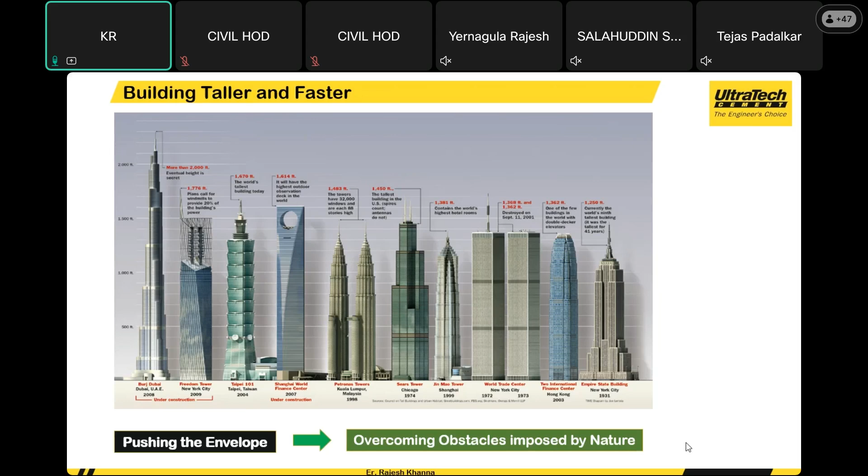The current construction happening in Saudi Arabia, the Jeddah Tower, is over 3000 feet. Just imagine, as concrete designers, these composite structures coming up. Earlier, because of limitations in size, shape, and moving up to a certain height, we were restricted to 1000 or 1200 feet. Over the ages, as technologies have been adopted and lifting systems put in place, we are now in a capable position to build towers and superstructures beyond a kilometer in size.

That's how we can imagine super tall buildings, most of which are found in Asia and the Middle East. Out of the 100 tallest buildings in the world, 59 are in Asia and 23 are in the Middle East, leaving 18 to the rest of the world.

In the next 3 to 4 years, we expect the tall Jeddah Tower in Saudi Arabia to surpass the current height of the Burj Khalifa in Dubai. The Burj Khalifa is about 2,716 feet tall, whereas currently we expect the 3,280-feet-tall Jeddah Tower to come up.

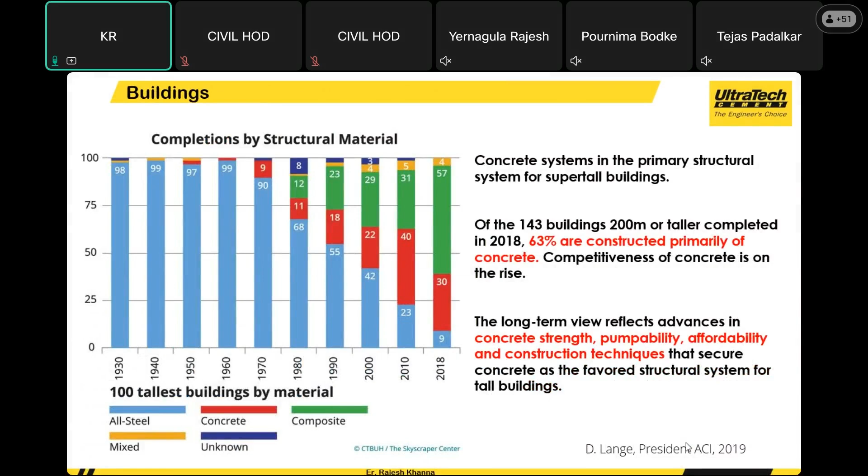And because without concrete there is no other material for infrastructure to go beyond. And if you see the facts, more than 2 tons per year is produced for every man, woman and child on the earth, making it the second most usable material after water. Basically it has been used mostly for housing sector, roads, bridges, utilities, power supplies and industrial buildings.

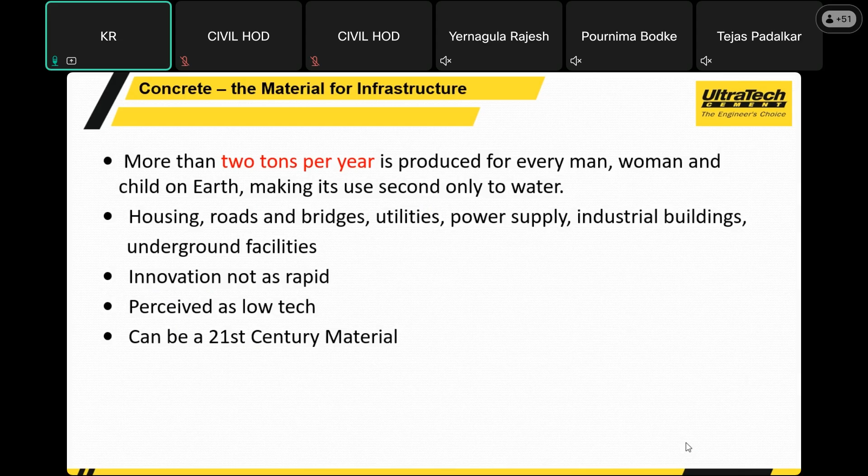I would say innovation is not so rapid because when we compare with IT systems like mobiles, TVs and other IT systems, the innovation is not so rapid. That is what it could be perceived or assumed to be a 21st century material, yet it is perceived to be a low tech material. So it is cost effective also.

So in the 21st century, we should have concrete which is more durable, more constructible, more predictable, more green.

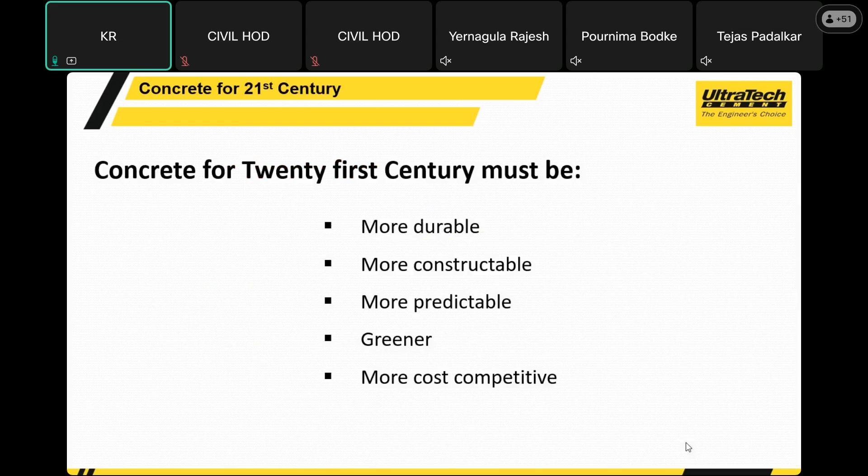More predictable, greener, more cost competitive. In such case, even in concrete, we also have certain challenges with the materials that we have. One is the most major constituent material that we use is cement. Even in cement industries we see challenges, and during the past, present, and future also we have these challenges. India and China will be contributing about 50% of global cement output by 2050.

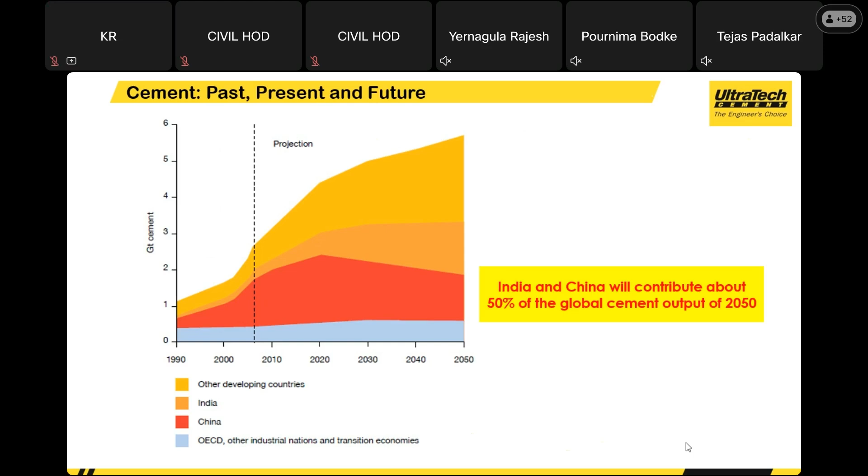Excuse me, sir. You're muted, sir.

Is it audible now? Yes, sir. We can hear you. Earlier it was audible, or now itself it has been muted? Now itself it has been, sir. Just now. That's it. Just now. Okay, sorry. Okay, I'll keep continuing from here.

The cement production capacity that we have for 2050 is 750 million tons per annum to meet the demand for the infrastructure that we have worldwide. Current available limestone reserves are expected to last for about 35 to 40 years, maybe, with the current rate of production. There is a huge challenge for cement manufacturing companies also worldwide.

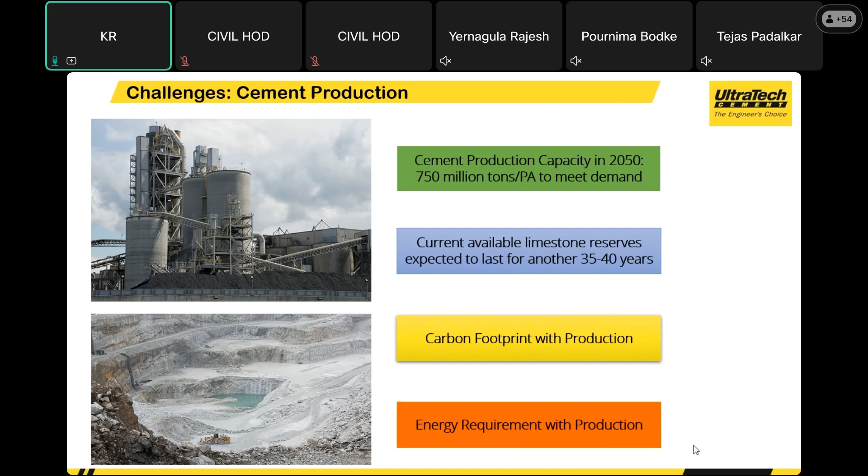One is the carbon footprint. So much carbon emissions are being emitted to the environment, which will lead to global warming concerns. So even though there is huge energy required for production, so much coal is being burnt, so much heat is being generated, so much power is required to produce 1 ton of cement, so much kilojoules of energy is required.

So these are all the concerns, and we have alternatives to cement production, which research scholars are still working on from IITs, NITs, and worldwide. There are many research scholars who have been working on this.

Now, currently, the trend which has started, even many companies have started adopting this LC3 cement, which is limestone calcined clay cement, which will even replace the clinker content in cement manufacturing, where clinker is the major component in the cement.

But now to have a replacement, we use calcined clay at 30%, limestone at 15%, and gypsum at 5% to produce the cement. That is how LC3 cement has been produced.

This would be a dead blow to the cement industries. Maybe they may not even implement it, or it would become a requirement when we are short on limestone reserves.

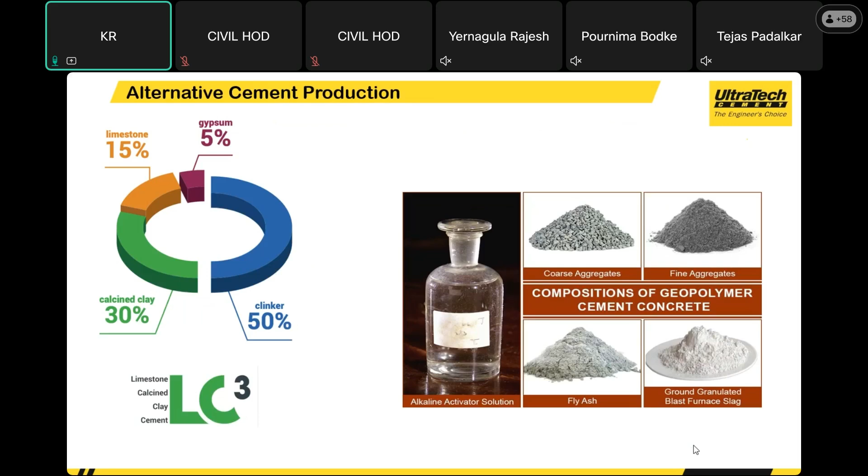This would be an alkaline activator solution, which as a replacement to limestone and all, we can even produce concrete. It is a no-cement concrete, I would say. Coarse aggregate, fine aggregate and fly ash would be the alternative additions for geopolymer concrete.

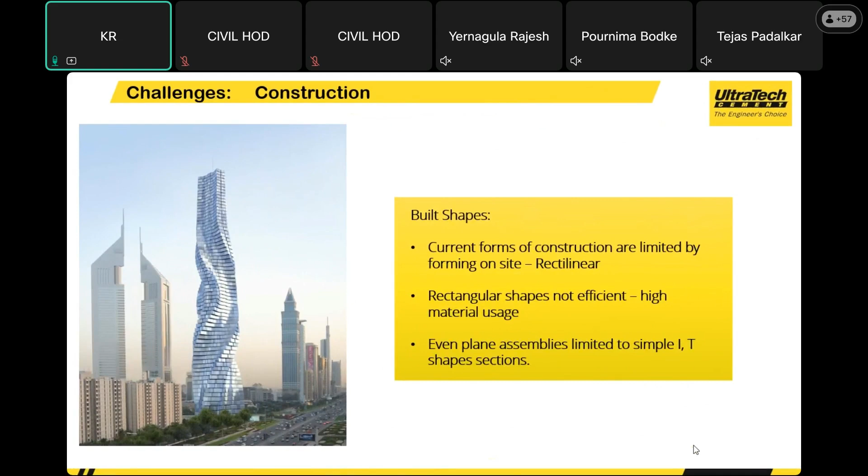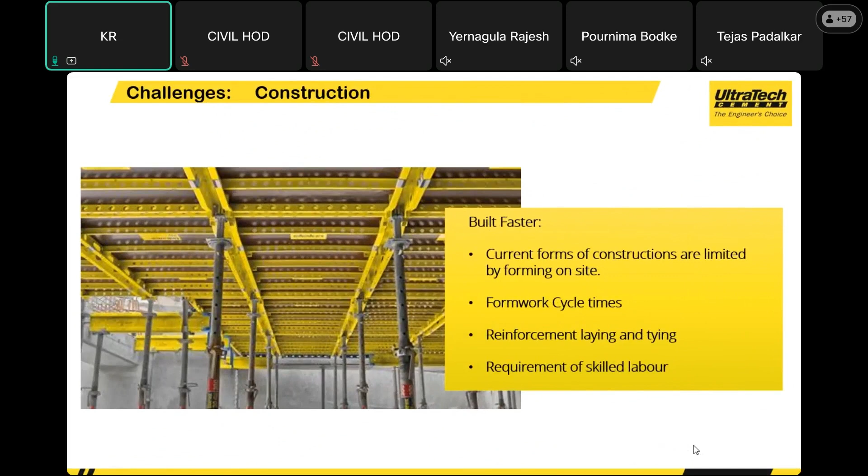Even in construction, we could see there are certain challenges. The current shape of buildings and current forms of construction are limited by forming on site. Rectilinear and rectangular shapes are not efficient, high material usage, and plane assemblies are limited to simple I-section and T-shape sections. With current formwork cycle times, and reinforcement laying and tying requiring highly skilled laborers, we could not go ahead in building faster or taller constructions. So that's how certain challenges exist even in construction.

But here, if a mechanical engineer or an automobile engineer had thought to give a capacity for four or five in all, beyond that it cannot work - the engine cannot even accommodate to pull this load, this much horsepower. So autos would not have been so popular in India. So that's how it takes extra horsepower or more fuel to pull such loads.

Here also in our context, if you're talking about construction, it is a great challenge to civil engineers working on the foreground to design durable structures. There is a huge gap that is still there.

That is how in the near future we need to bring it down - structural consultants or structural engineers who design any structure sit in a different office, while concrete designers like me sit in a different setup at an RMC plant, ready mix plant, or at site. So what happens is there is a huge gap. We don't sit and discuss when we want to design any structure. Concrete is only thought of as a strength-based material.

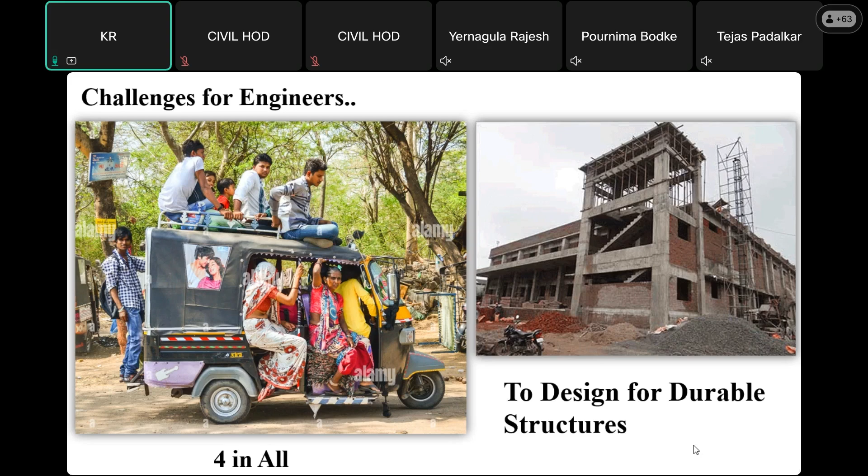But when we see structures designed for 100 plus years, like Statue of Unity or Delhi Metro, which is designed beyond 100 plus years, it means concrete casted today should have a life of about 120 years, should not have any premature issues. It should be durable and the durability should be more, without replacing or using alternative materials. It should be more sustainable and have more service life - that is the next thought.

So making concrete responsive to the requirement means you should have tailor-made installations. This could be the next future ball game, because each construction is a different ball game. In India we have also started implementing performance criteria or defect liability clauses that are being included in the contractual agreements by any contractor who does any project, building, or infra project.

It means whatever construction is done by a contractor should have sole responsibility for a certain number of years, so that the structure is under his custody or control, meaning if anything happens he has to repair and rehabilitate it and hand it over to the client. That's how the performance criteria comes into picture.

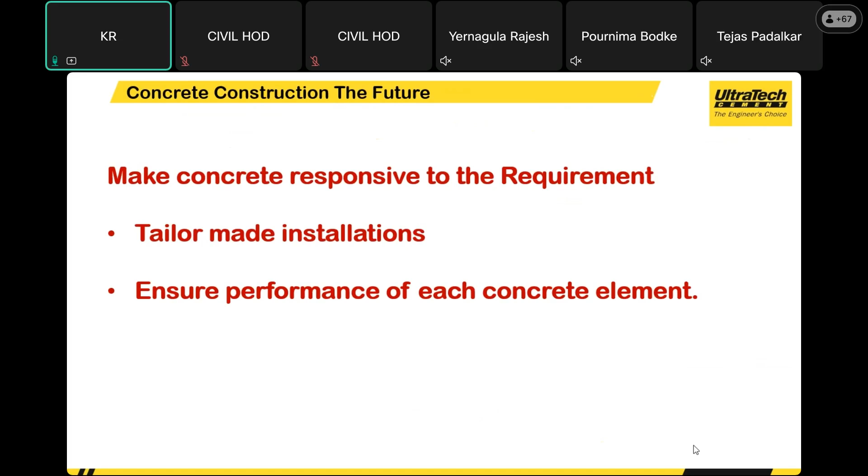Most of the IS codes are being revised in the near future, with performance criteria and material science related to concrete being considered by all the research scholars working on concrete technologies.

When we think about concrete for any construction requirement, apart from four points - grade, cost of concrete, and workability - ultimately where we still stand is only on strength. That is what all codes so far are still talking about: characteristic strength of concrete, or FCK. Beyond this, there is no point that comes to mind when we talk of concrete.

We generally think that mixing basic ingredients like cement, sand, aggregate, with some partial addition of admixtures, will make the concrete - that's what we have in mind. But beyond this, in the near future, this would be the thought.

To give a classic example to help you understand, take a star cricketer like Virat Kohli, who has great fitness and can stand on the field with high energy levels. His diet, his entire system, is something different from what a common man has. A common man can eat biryani at midnight, but Virat Kohli may not, because his system says he shouldn't, since if he eats biryani at odd times or takes a high diet, he has to hit the gym for 3 to 4 hours.

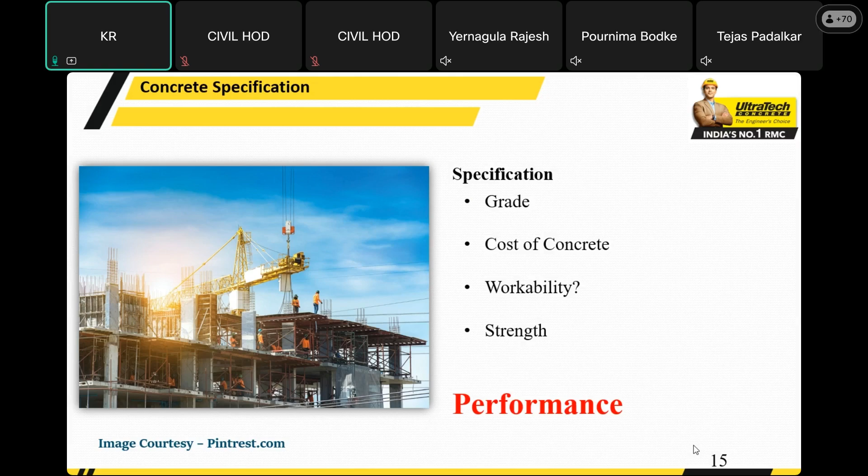So now when we talk about concrete for performance-based design, the methodology is such that structural criteria are expressed in terms of achieving performance objectives - performance during formation and during the service life.

So we have a conventional method. As I said, we are still only talking about strength, where FCK is the point of discussion. Concrete as a material is only looked at and talked about in terms of strength. So all structural member capacities - even structural engineers working on the ground - are still looking at steel members to handle stability or take huge loads.

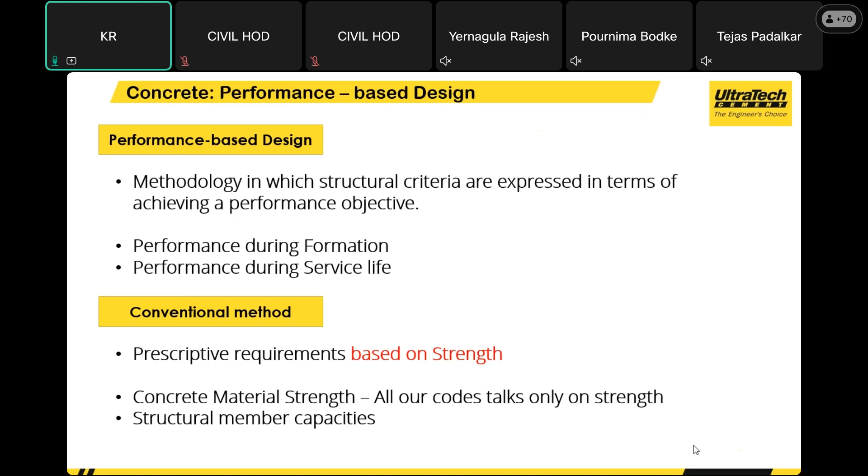So in the near future, I think the higher grade of concrete that we can now achieve with all locally available materials is M200, where Ultratech takes the pole position in doing this with Indian locally available materials, with no fancy powders added. It means it's even replacing the strength of steel.

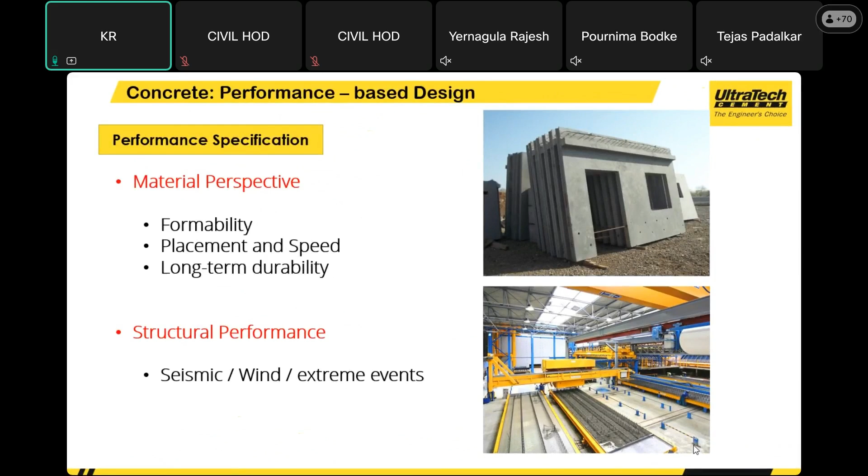That's how concrete can be easy to form, easy to place, with speed and long-term durability. Now you can even set the concrete on demand. Suppose you wanted concrete that sets in 2 hours, not just the 10 hours our code specifies - it can set in half an hour, or 1 to 2 hours.

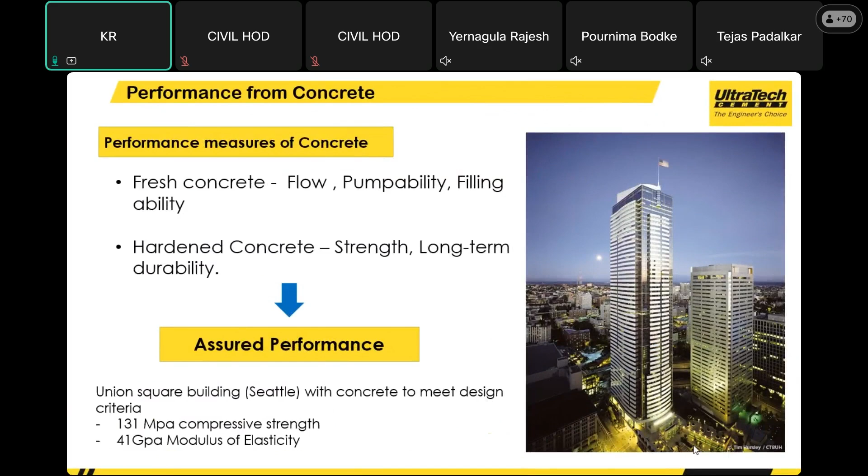Or if you want to accelerate the setting time, you can add fantastic different admixtures that are available right now. Now, if you see the ideal concrete we talk about right now, it should flow like water - meaning it should be pumpable to any extent.

Now if you imagine the Statue of Unity, the concrete prepared at zero level at a batching plant on site was pumped up to 600 feet tall - meaning it should flow like water. But water means we tend to see segregation, bleeding happens, and the concrete becomes porous, so we generally don't recommend adding more water.

But now to have a concrete which can flow on its own, we call it self-compacting concrete. There are viscosity modifying agents being included in these admixtures, which now gives a fantastic combination that can flow like water.

So we can set the concrete on demand, say for 2 hours if you wanted it to set and get hardened. There are fantastic accelerators which can be used to achieve ultimate high strength, rather than waiting for 28 days or 56 days or other strength criteria. Now you can expect your 28-day result, say for example M30 grade concrete, we expect 30 MPa at 28 days, but this 30 MPa can be achieved in just 12 hours. It means in half a day you can get this strength, so it should gain its strength rapidly.

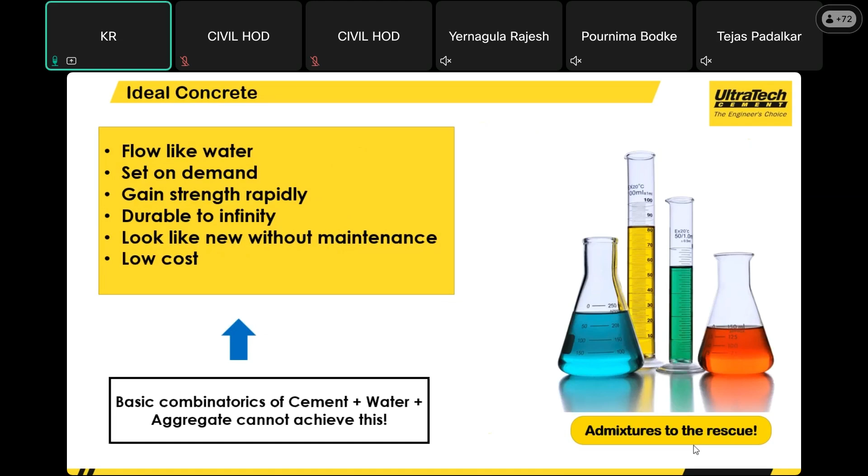And there is a big laundry list of admixtures - I won't touch on this more because it will take us into a different subject. But we have gone almost beyond this now. If you want to avoid corrosion happening in concrete, we have corrosion inhibitors, air entraining agents, accelerators, retarders, and integral waterproofing admixtures.

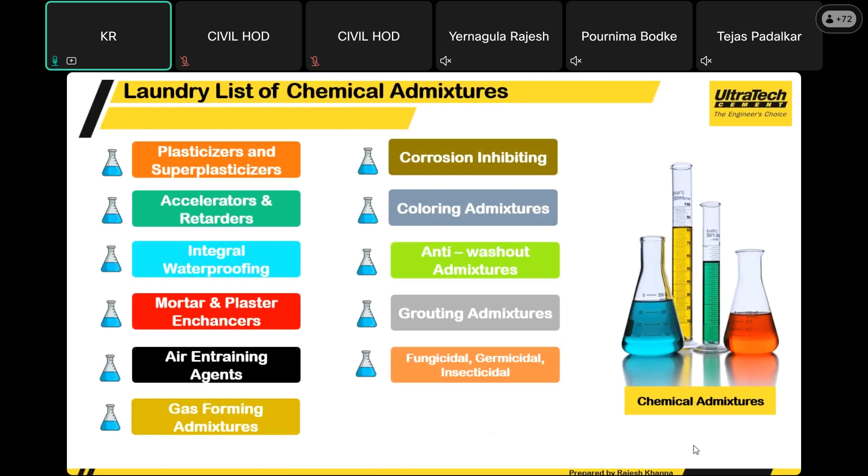Now we are in a trend where we use super plasticizers and hyperplasticizers - a huge development has happened in admixtures. In olden days, some decades back, there were certain constructions where animal blood was used in concrete to achieve retarding or accelerating kinds of nature. So that's how we started from there.

Now we are in a super plasticizers next generation, where we use viscosity enhancing additives. And in the near future, we may also see more advances coming in admixtures which will help the rheology of concrete.

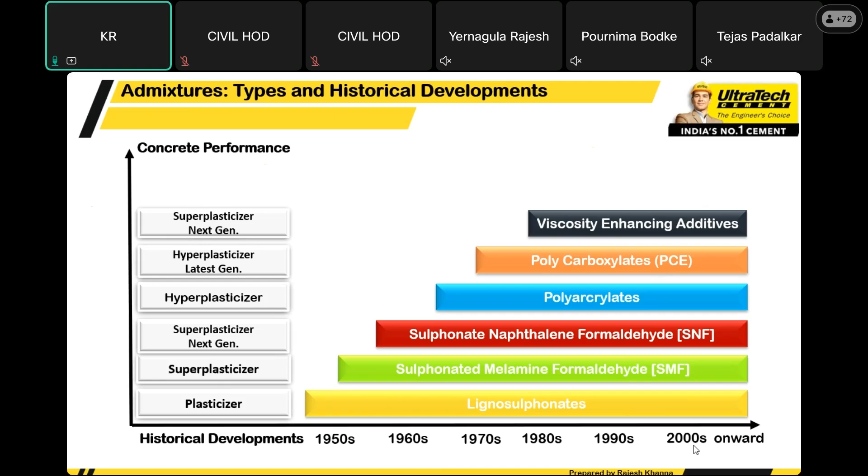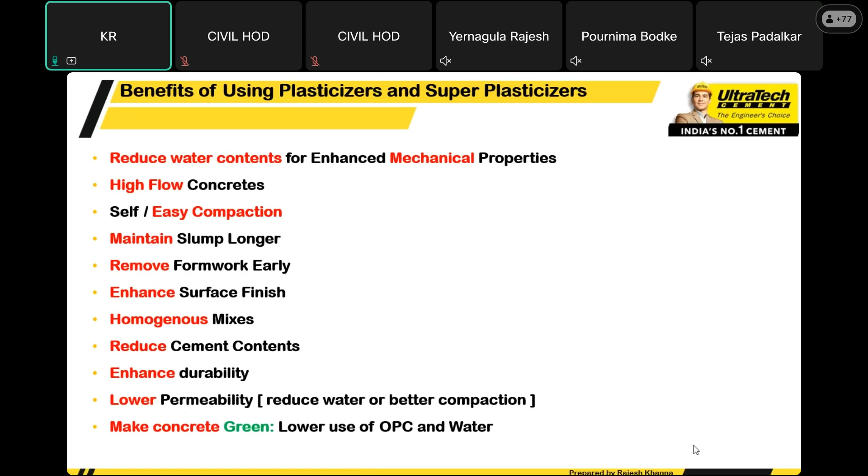Because in concrete, if you think about it, every material is a natural resource - from limestone to natural aggregates, coarse aggregate or fine aggregate, and the water we add - everything is a natural resource. To mitigate and minimize the usage of more natural resources, we have replacements called supplementary cementitious materials or mineral admixtures, and chemical admixtures try to reduce the water content. Water reducers are there, high range water reducers, so that you get great strength and more durability.

How does this happen? So to see this compatibility between admixtures and cement in a simple way to understand - like a boy and a girl who want to get married, we take both of their horoscopes and go to a pandit to see if their stars align, so that they get a better life after getting married. That's how we need to understand admixtures and cement in a big way, to understand the compatibility, because each admixture will behave differently with each cement, each source of cement.

So before we carry out using these admixtures in concrete, we understand the compatibility through the Marsh Cone test, to understand flow, stability, and passing and filling abilities, in such a way to enhance the compatibility of the cement and admixtures. So when there is any compatibility problem, it could affect properties in terms of more rapid loss of workability, quick setting, retardation of setting, or slow strength gain.

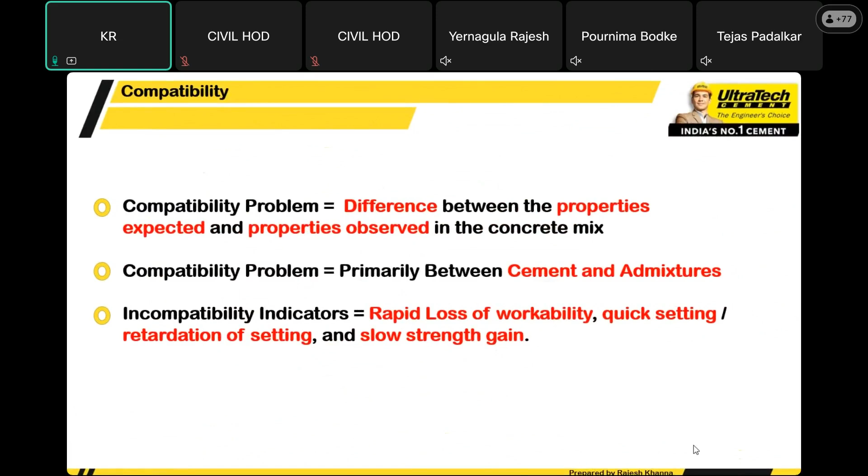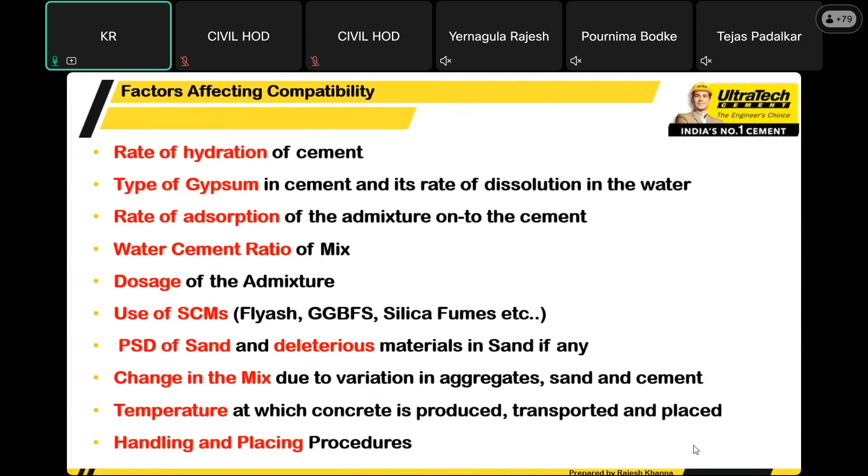That's how the compatibility challenges that you could see. Moving on, there are many more factors affecting it, like rate of hydration of cement and water-cement ratios of mixes. These are the factors affecting the compatibilities, and much more depends on the climatic conditions also. There could be some challenges that we could see.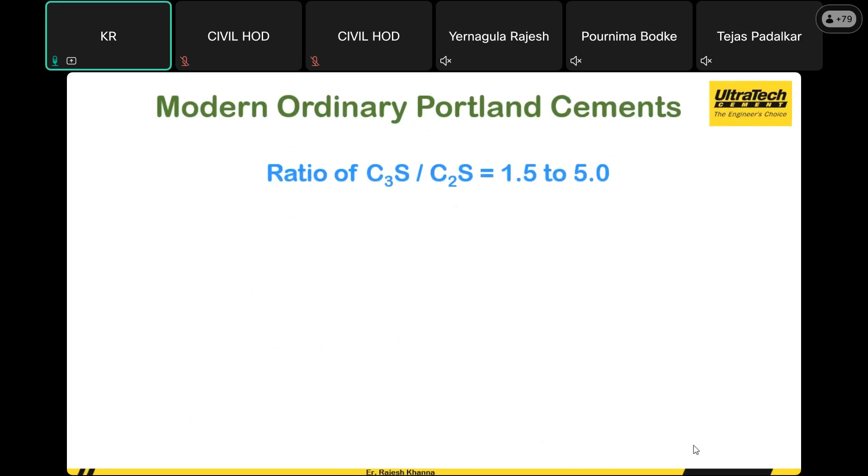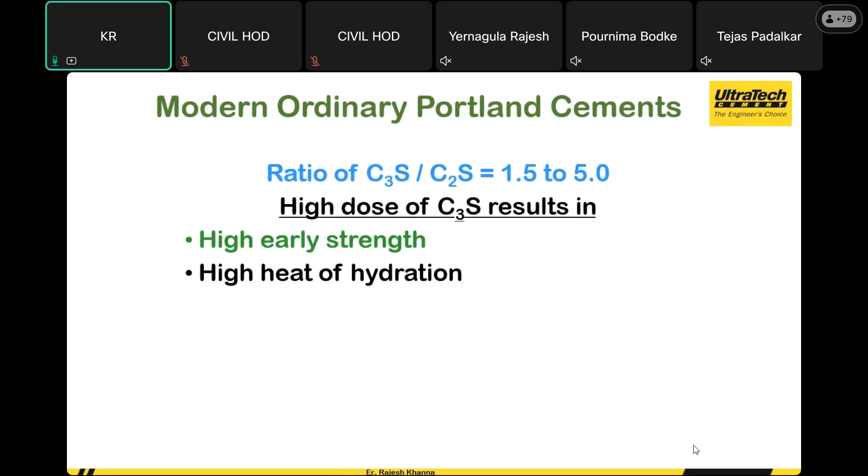If you see modern ordinary Portland cements, when we talk to any consultant or construction contractor, they say we need more content of cement. I don't know why - there's no logic in that, saying that when we add more cement to any concrete mix, we'll get more strength. It's assumed in a clear way that more cement means more strength, but it's absolutely dead against that. We can even achieve high strength with less cement content in any concrete mix.

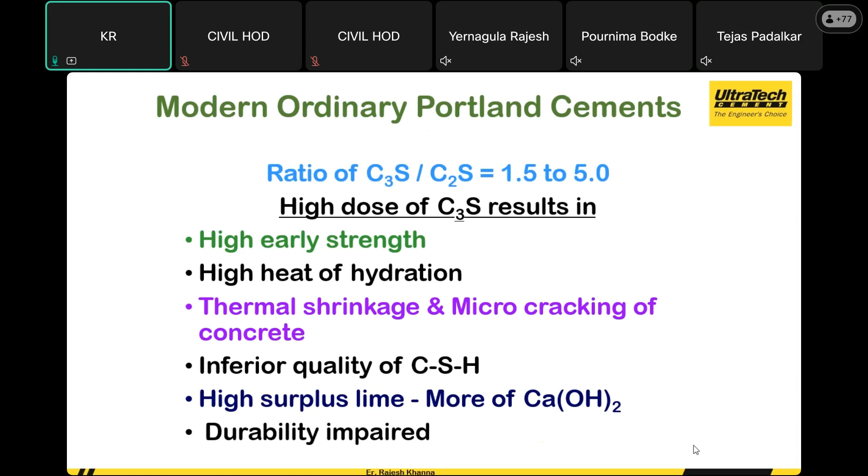So to have high early strength, you get high heat of hydration. If there's more high temperature in the concrete, it leads to thermal shrinkage and micro cracking. That's why when we go for thick rafts and mass concreting, we bring down concrete temperatures in a big way, reducing 10 to 15 degrees, by adding chilled water, or reducing the cement content by 50% and replacing it with mineral admixtures like GGBS, fly ash, and other additives to gain strength. By doing this, you'll see a huge drop in shrinkage cracks, and micro cracking of concrete doesn't happen.

That's what when we design any concrete, we need to understand all this material science in a big way. One alternative is blended cements, already produced at the plant - what we call Portland Pozzolana Cement (PPC), where fly ash is induced at the time of production itself. We also have PSC cement, Portland Slag Cement, where we use GGBS as an alternative, produced at cement factories and transported to sites for different uses.

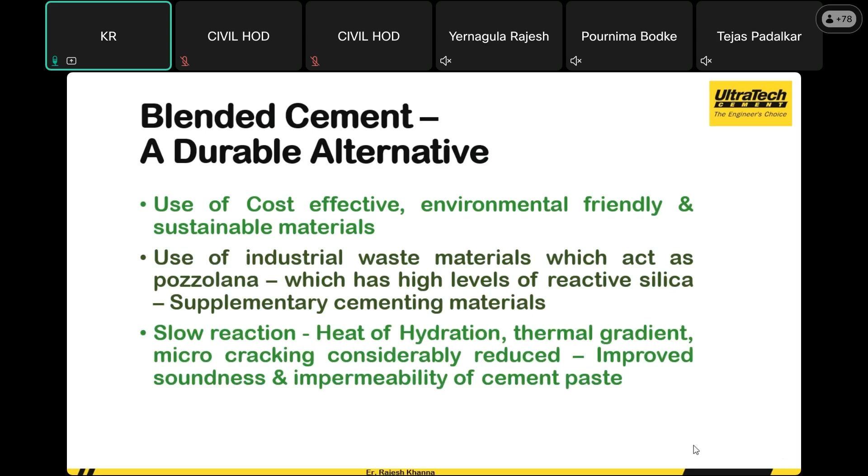When we use these supplementary materials or blended additives, they have a slow reaction where the heat of hydration is much less, and micro cracking is considerably reduced, improving soundness and impermeability of the cement paste. That's how we see sustainable or durable options coming up when we use blended concretes or cements. We get better reduction in bleeding - the mix looks like kozhukattai, like our curd rice. There's much improvement in workability. That's how supplementary cementitious materials keep helping us.

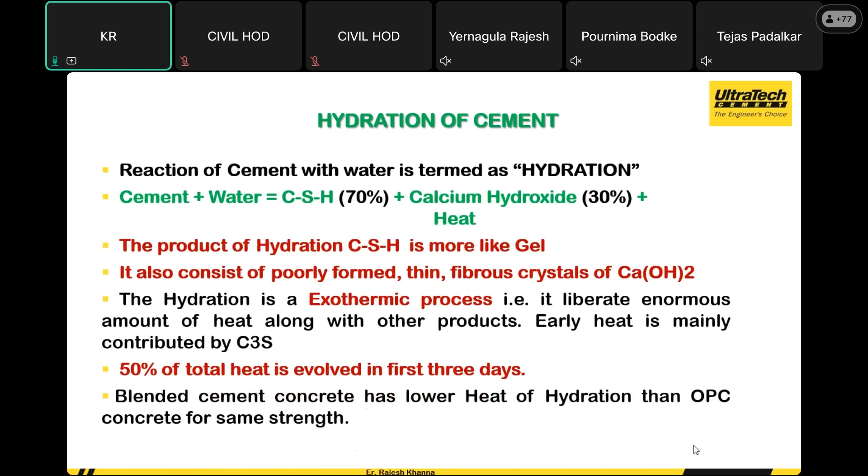When we see hydration - how this happens when we add water to cement or concrete - we get a reaction which forms CSH gel, more like a gel, plus calcium hydroxide of 30%, plus heat. With OPC grade cement or concrete, you have only single action hydration. It's like primary - calcium hydroxide plus CO2 plus humidity would degrade, and there would be only single action of hydration which happens.

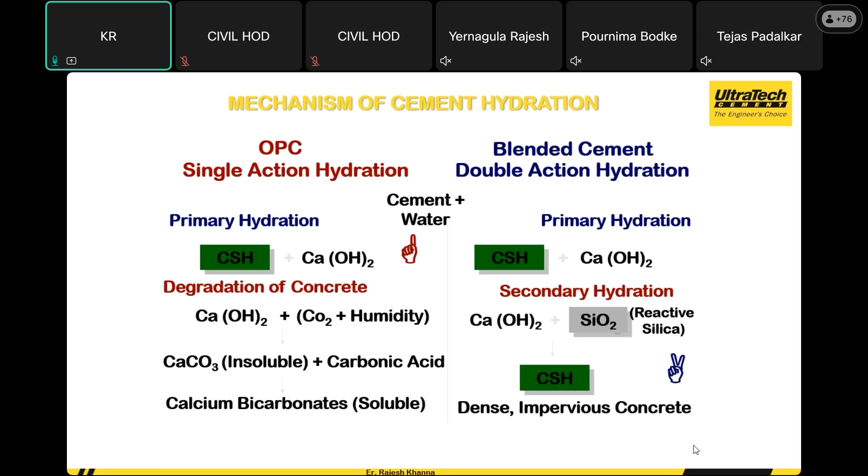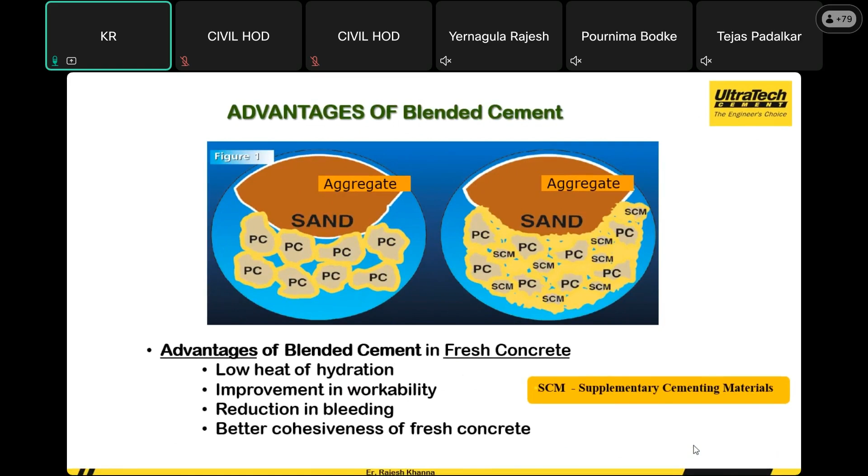When you see blended cement, it has a double action hydration where the leftover calcium hydroxide also reacts with reactive silica, to have a denser, impervious concrete - meaning all the packing system is done in such a way. In this image, the left side is PC, standing for Portland cement, where you find the voids are still in place. On the right side, you have SCM as supplementary cementitious material, also called mineral admixtures or filler material. Not only as filler material, but these are reactive silica where it can have a double or secondary reaction, forming a dense and impervious concrete.

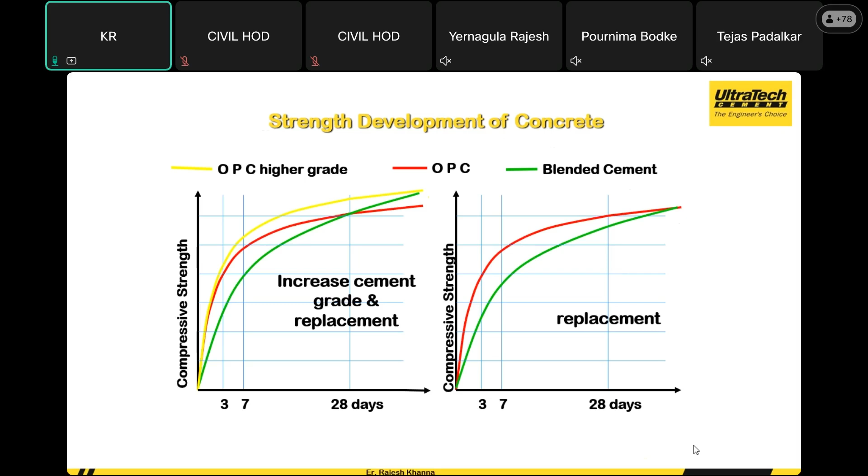We could see there's a huge gap of strength developed in blended concretes. The initial strengths may be slightly lesser compared to higher OPC grades, but at 28 days or even beyond, there are examples where strength keeps gaining up to 90 days or even 1 year. So it's very sensible to go with blended concrete construction, which helps enhance strength, durability, and other aspects as an eco-friendly or green concrete.

Natural aggregate sources are rapidly depleting, and with non-availability, we still have a great dilemma on using recycled aggregates. Many researchers are working on replacing natural aggregates. When we demolish any building or structure, not even a percentage is being used from this construction and concrete debris, the C&D waste. So nothing from it is being used in fresh concrete.

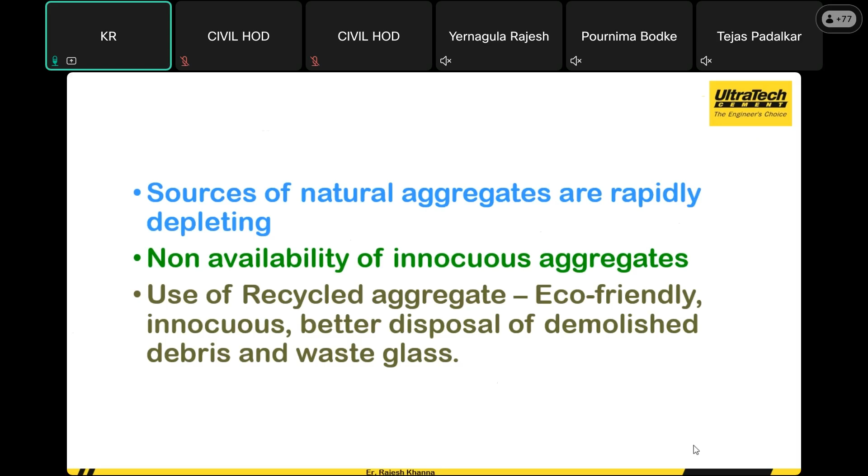I did my graduation project on recycled aggregates, where we wanted to replace 10, 15, 20% of natural aggregates with different sizes of coarse aggregates. So there's still much scope for us to have better, durable concrete structures with sustainability in mind.

When we see newspaper clippings on articles that have been started and implemented, many states have begun implementing it. We still have a big challenge with governing bodies who take the decisions to implement all these codes and the permissions and approvals for this.

Now we are in 2025. The current trend that we see in concrete right now in India has already been adopted in developed countries some three to four decades back. So we are still lagging in terms of adopting these systems.

Self-compacting concrete, which we'll talk about in the next slides, was developed by Japan in the 2000s itself—that's 20-25 years back. But only in recent times, before 5 years, I think, has it been incorporated into our IS code 10262 as a criteria. So that's the huge gap coming from the government side also.

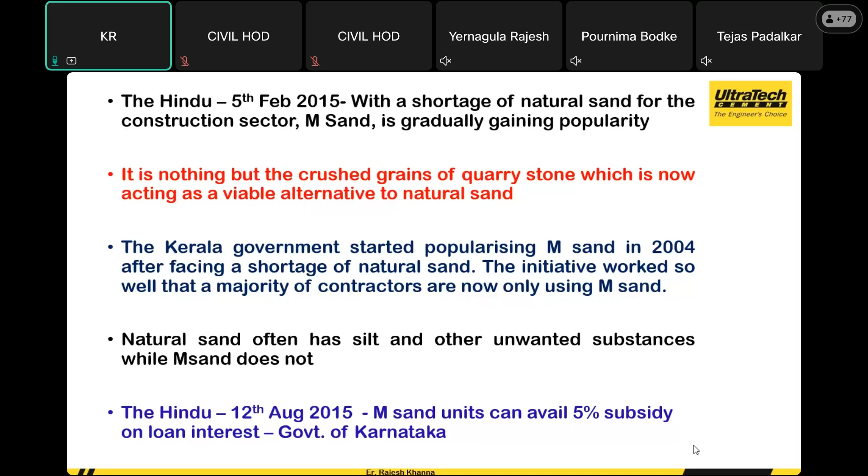Even with a shortage of natural sand, when the construction industry faces delays in handing over projects, replacement with M-sand is gradually gaining popularity. Many governments are giving subsidies on loan interest, and due to non-availability in metro cities like Hyderabad, Delhi, Chennai, Bangalore and others, we don't have these natural resources because of tremendous construction activity in these metropolitan cities. So we have to go ahead using manufactured sand.

When talking about durability in a broad sense, we need to understand from the design approach to the processing end—only then can we adopt and see the durability aspects, right from environmental impact and design aspects, performance criteria at the time of design itself, and at the time of processing, when we need to understand material characteristics, mix proportioning, placing, compaction, and curing.

This means the performance of concrete comes during placing, during forming, and all. Only then can we see the durability aspects where a structure can perform well in a longer run.

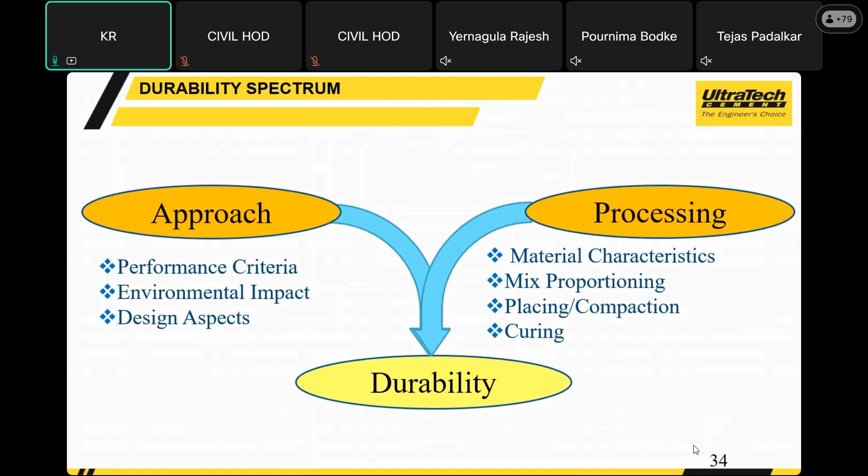So what influences the durability of concrete? It means concrete is less durable when physically or chemically compromised. Cracking due to shrinkage can allow reactive gases and liquids to enter, because any structure exposed to environment will have changes in climate and allow unwanted gases in. If there is any steel member or reinforcement inside the concrete, it gets affected and corrosion starts there, which weakens the structure in a big way.

We could see certain structures built in coastal areas will have much more challenge with this.

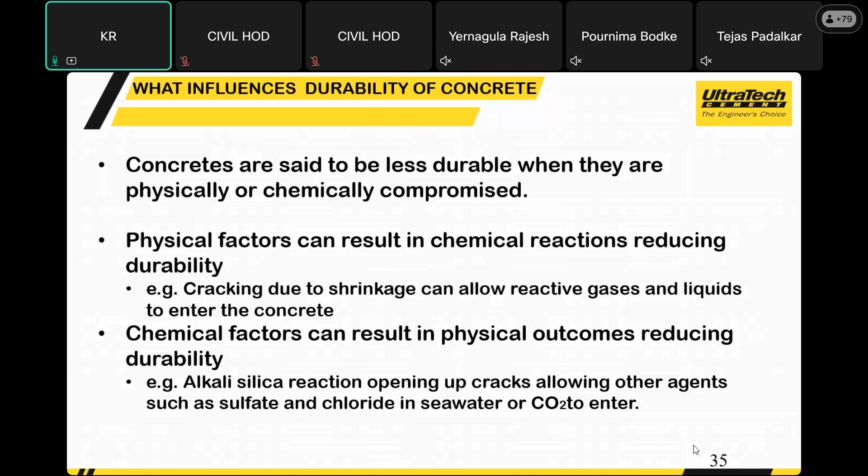That is how there are certain challenges like alkali silica reaction, opening up cracks and allowing other agents to enter into the concrete and form chloride or sulfate on the steel bars, increasing the corrosion rate. So that's how this will influence the durability aspects in a big way.

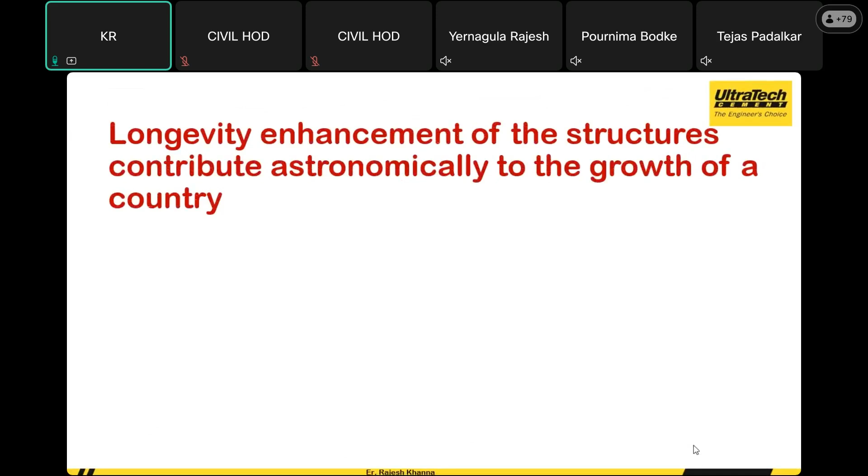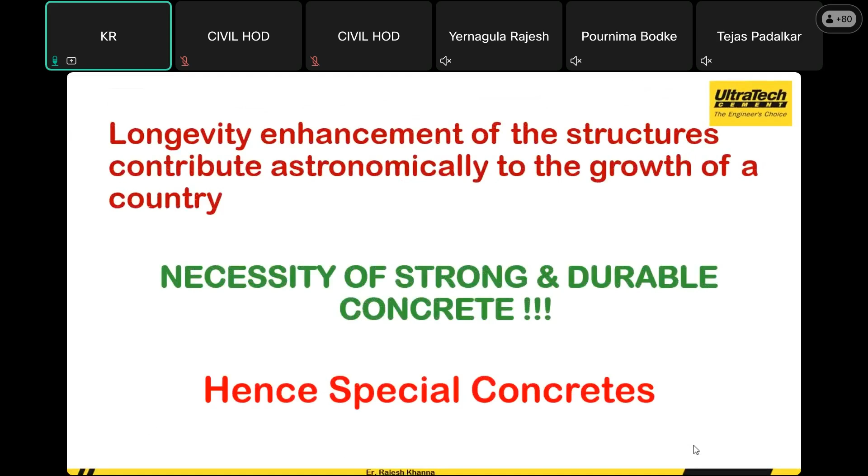When we want longevity of structures, which contributes astronomically to the growth of the country, we need special and durable concretes with a new trend we want to adopt, called special concretes. We cannot go with the regular conventional approach because systems are working differently, and now in IT systems we have artificial intelligence. We can also monitor the strength and health of a structure with different equipment that keeps coming up. That would be the new trend, I would say.

We also have certain challenges, running short of time, but I will try to bring this down in future slides. Not just minimizing the dosage of cement, we also use supplementary blended cement, as we spoke already. We use fibers to have great resistance to shrinkage cracks in the fresh stage. We also use unconventional materials like supplementary cementitious materials and replacement with recycled aggregates and more.

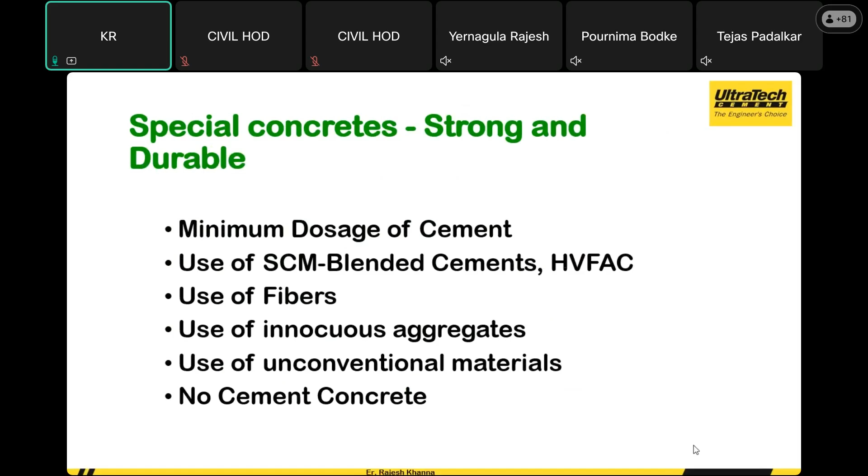No cement concrete is what may be, in the near future, a game changer to construction. Without limestone or cement being used in concrete, we can also produce concretes in such a way. Maybe that would be the real trend, changing things.

When you have congestion in the reinforcement with two perpendicular walls, can we get conventional concrete in there when we don't have any scope to put our vibrating needle to compact? This would be a big challenge, as structures will have a honeycombing nature or porosity that degrades structural integrity. If there is congestion in the beam and column joint, that would be a big danger to the structure.

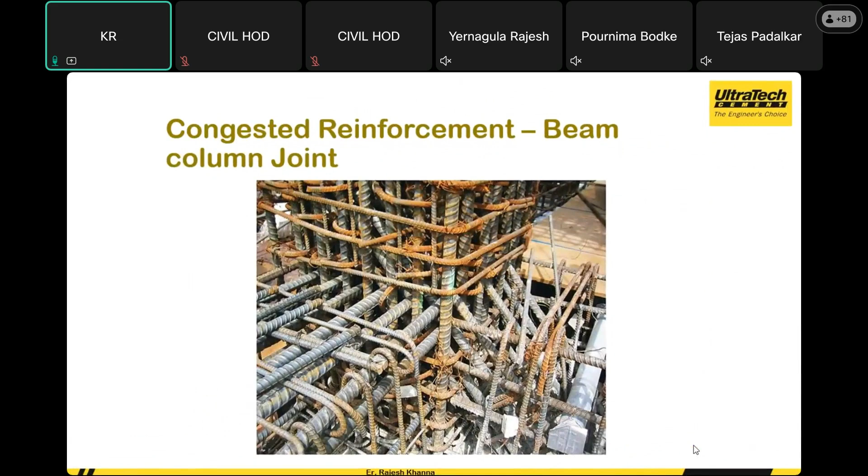So we have to have a concrete called self-compacting concrete, which doesn't segregate, having segregation resistance from the mortar viscosity, without the aggregate grading out. This is called concrete which flows on its own.

The cost may be initially high, but now with current development in admixtures, like viscosity modifying agents which are combinedly given in the admixture itself, it will help you get a better result than in olden days.

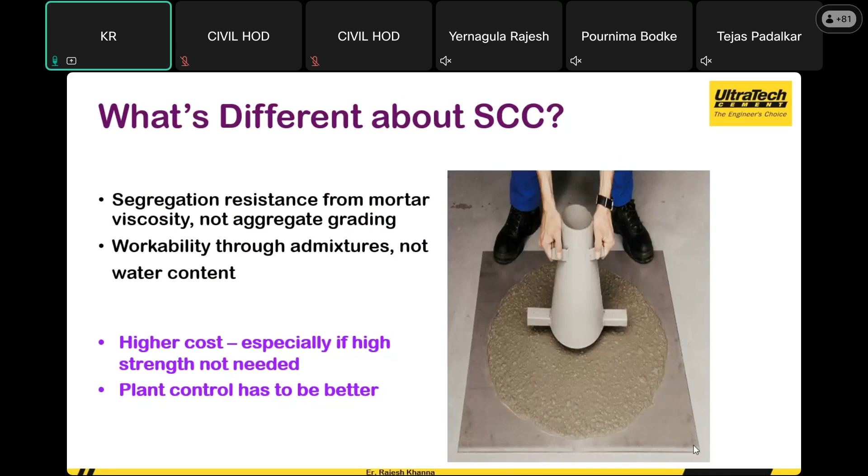In our colleges and laboratories we have the slump cone, but when slump goes beyond 200 we say this is a collapsed concrete. With self-compacting concrete, we don't talk slump, we only talk flow. The flow of this concrete is about 500 to 600 mm, so it has to be tested on a flow table. It should have high control for flowing and filling abilities.

And the mix is something of a different secret, I would say it is a real miracle to the engineering fraternity, in that if you want to send concrete to any nook and corner, into any different architectural shape, with this concrete you can achieve it.

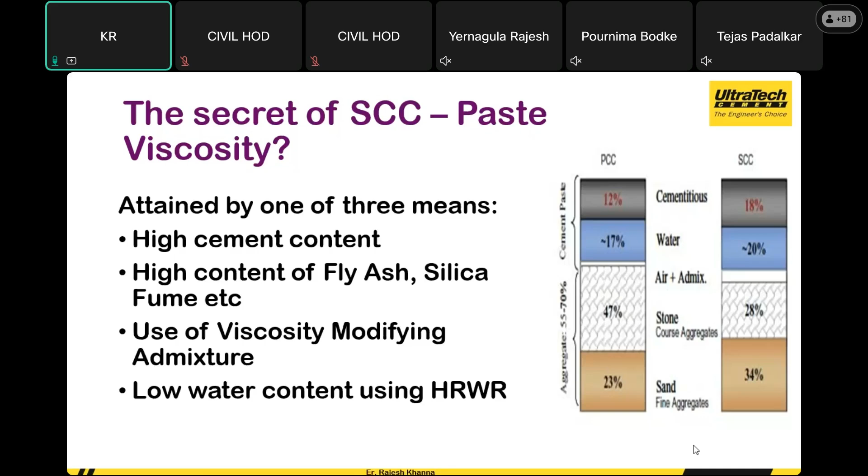This is the secret of self-compacting concrete: more fines and less coarse aggregates, so that using viscosity modifying agents or lower water content with high range water reducers, you can achieve self-compacting properties within the concrete, leaving a concrete which flows on its own.

When we talk about concrete in a big way, we also see that concrete has a nature to crack. Cracking of concrete is an inevitable phenomenon, we cannot even stop it. We have to control concrete from cracking by having certain remedies and systems in place.

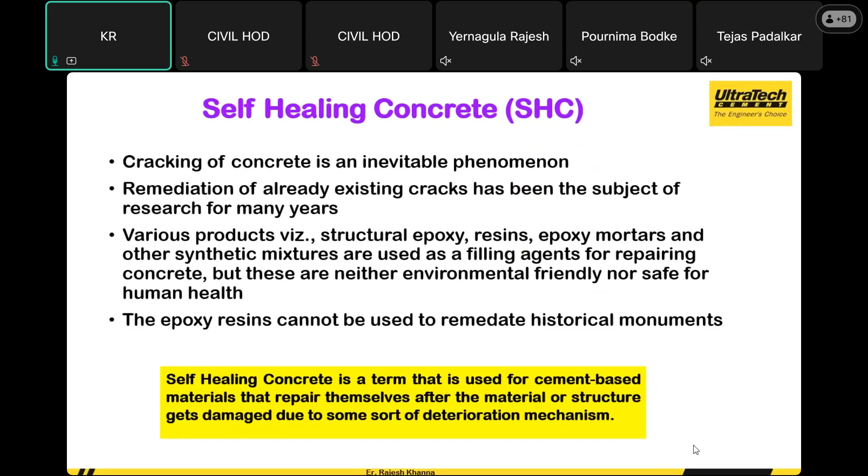But now we have a concrete called self-healing concrete, where concrete can heal on its own. This is a cement-based material that repairs itself after the material or structure gets damaged due to some deterioration mechanism. Not all structural cracks may be addressed, but micro cracking or macro cracking can be healed on its own, because it is just like a bacteria added into the concrete during the time of batching.

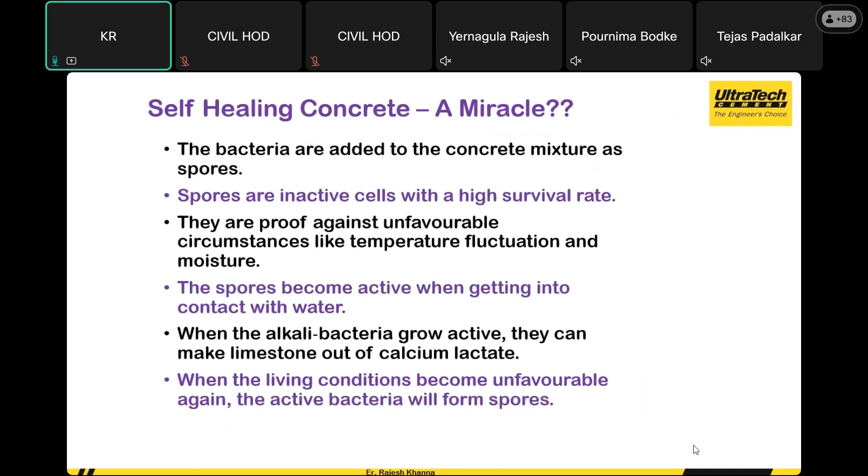It will have a high survival rate, even though if any structure will have certain micro cracking beyond 15, 20 years, if there is any presence of humidity or moisture, this will get activated and it forms a healing nature. It is just like an alkali bacteria grow active, then they make limestone out of calcium lactate and forms the healing. This is how you understand it.

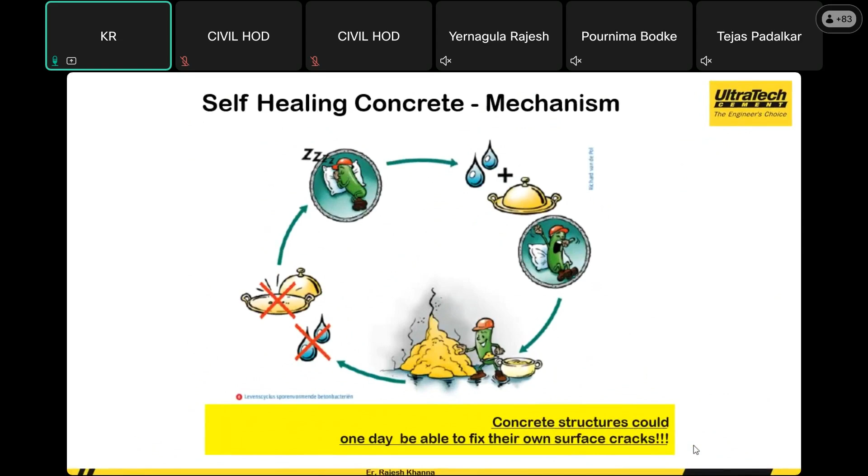There is a pictorial to make you understand: if there is any water or moisture presence, it gets activated and the healing process happens. It doesn't happen overnight. It takes about 50, 60, or even 100 days to heal the size of the crack that you can see.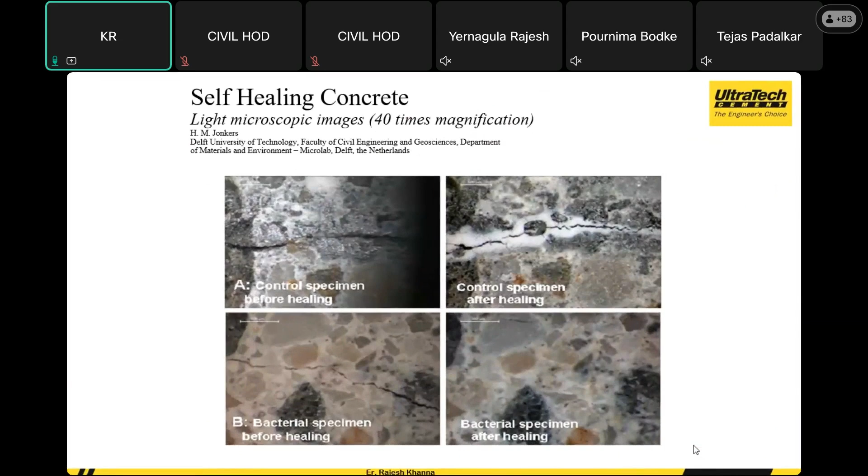And if you can see these microscopic images, there is a crack in figure A, and slowly it has been healed out, and you could see the bacterial specimen after healing. So you could see as if there is no crack on it. It doesn't happen overnight, it takes some time to do it.

We also see that 1 cubic meter of concrete requires 3 cubic meters of water, because this is also a natural resource. When I was working at Bangalore, there was a huge shortfall of water availability for domestic needs during summer time, some areas in Bangalore don't get water every day, they get it once in 3 days or once in a week. So there's such a shortage of water, and you could see the density of population increasing in metropolitan cities, and every government is focusing on urbanization and infrastructure. Without concrete, there is no other activity that happens. Every human needs a shelter, a place to live.

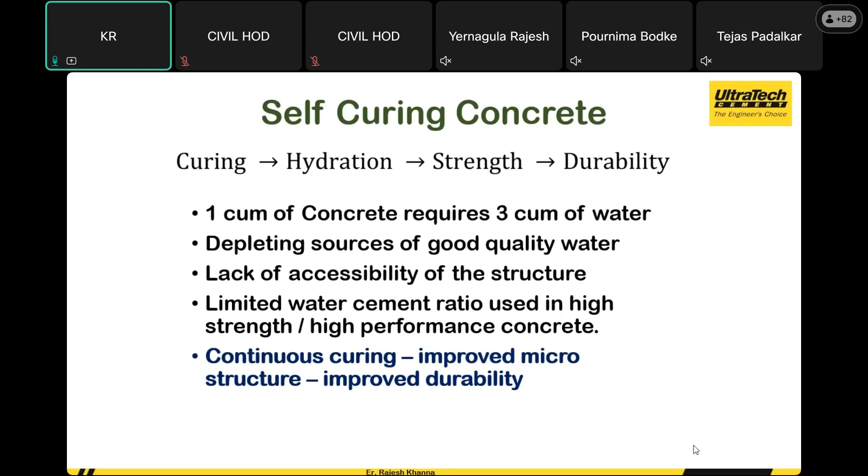So in such a case, concrete is seeing a big challenge for curing also. If concrete that is produced is of any grade, it should still be cured. With the depleting sources of good quality water, we are lacking accessibility, because a limited water-cement ratio is used for high strength and high performance concrete, requiring continuous curing. But now, when we have a shortage of water, where is the option to go ahead with this?

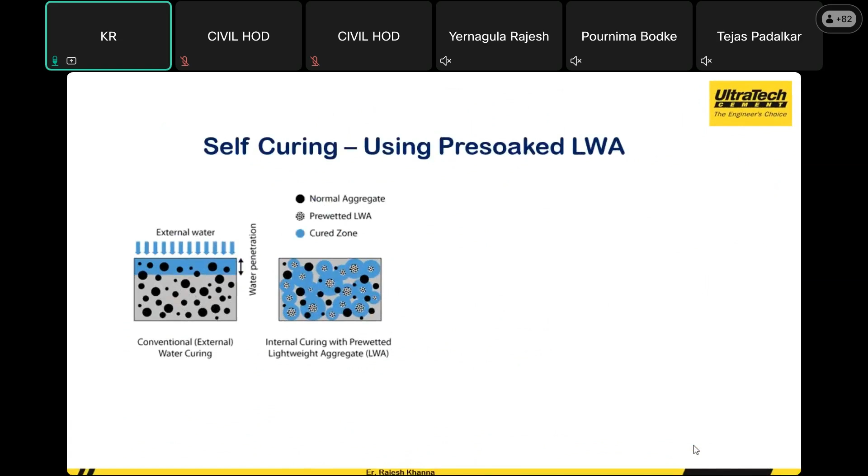So we have this system called self-curing, using pre-soaked lightweight aggregates, or after completing the concrete and deshuttering it, we apply a curing compound onto the surface soon after deshuttering, so that there won't be any moisture loss. Whatever water has been added in the concrete, it means like you wear a sweater in the summer and you get sweat - it means water is coming from the body. Similarly, whatever water has been added in the mix will be used for curing purposes. That's how self-curing compounds work right now.

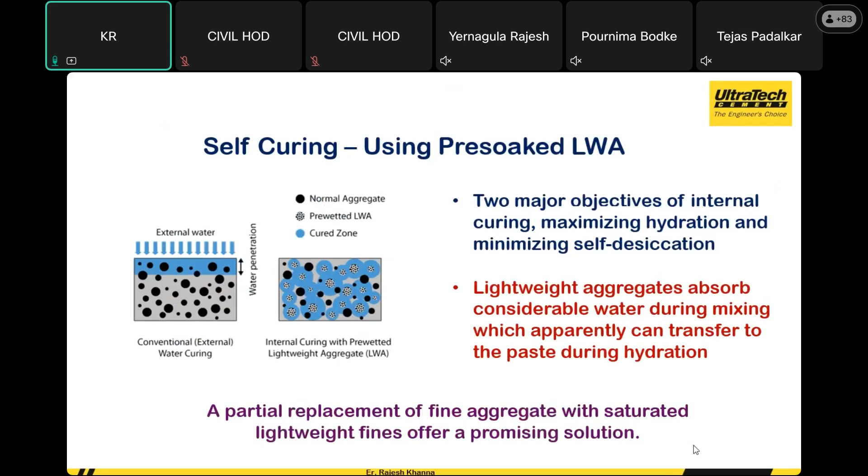Now we are doing it as an external application for concrete surfaces. A lot of research is happening where you can add pre-soaked lightweight aggregates, or an additive that is added at the time of batching, so that you just lay the concrete and leave it. It takes care of the entire curing activity required. There will be a slight drop of strength, but this helps us save some of the water demand that we have in construction, where water is much more required for curing. So this will replace, as a partial replacement, the curing practices that we see.

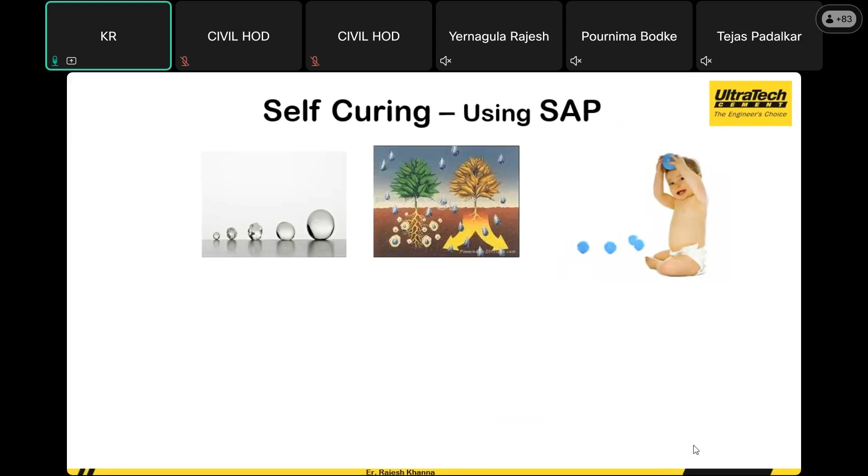It is just like a diaper, where it seems dry when there is no moisture or water in it. When a kid has more urine, you could see it gets bulged. So that's how the curing works, just to make you understand.

Even now, when we are using these systems, concrete is formed in different layers, passing from nozzle to retain its shape. There is a mixing pump where we feed all the materials, and with a bit of aeration, it passes through the pipe to a robotic machine connected with a nozzle. Certain polymers and binders like cement and other additives help it pass through the nozzle and form a shape. If you want to build any shape, it forms in layers. This is how the system works.

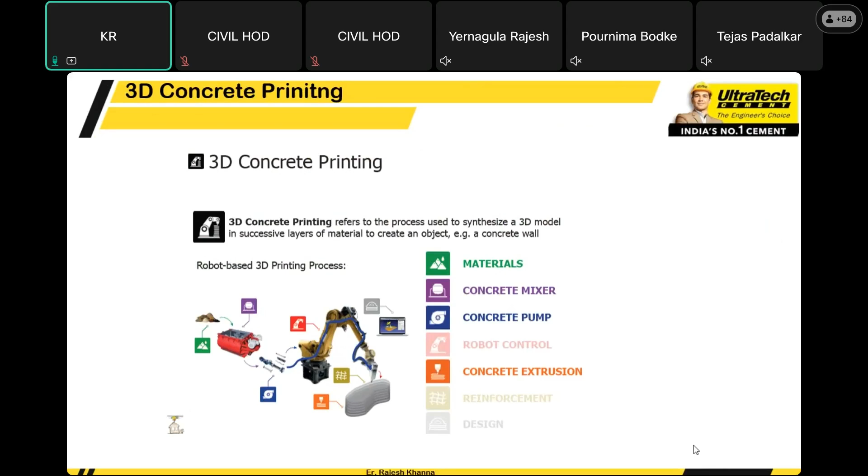3D printing refers to the process used to synthesize a 3D model in successive layers of material to create an object, for example a concrete wall. Certain polymers are added to the concrete, and now you can bring any shape in different layers. That's how 3D printing works.

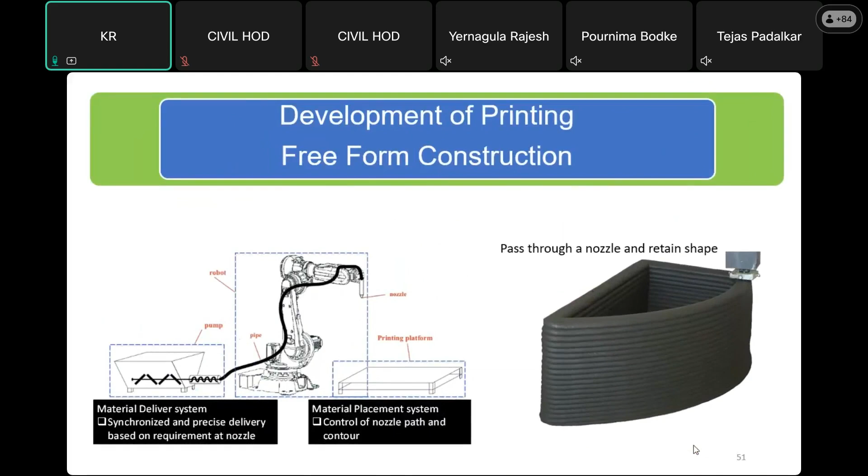But there is a huge disadvantage still. Things are working in a different line, so beyond that we cannot go. That's how it has got some disadvantages in cost and strength parameters, because there are no structural steel members being inserted—it is only working on this concrete as a strength.

So if you could see, the engineering of a material develops with the technology, expressed with the concrete. If you want different shapes and different sizes, this 3D printing would be a new ball game for the construction industry. Many colleges, research institutions, and startups have started doing this 3D printing in a big way for architectural shapes and sizes.

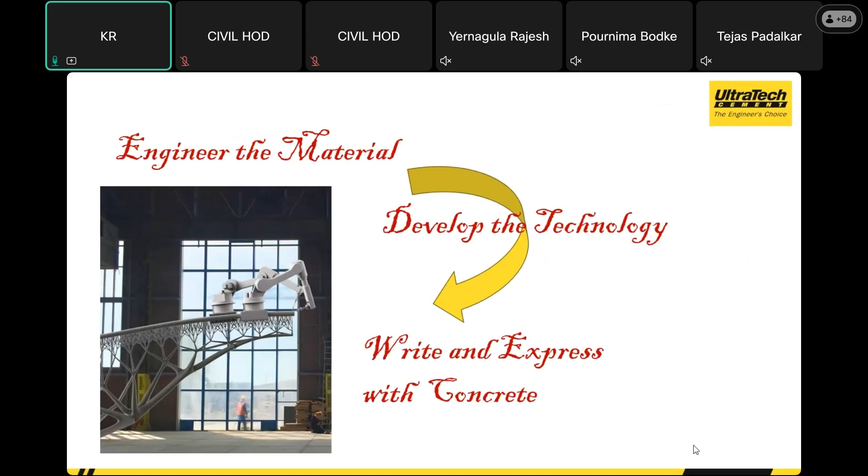But slowly, I think this would be an adoptable case in the near future, so that it would be used for certain applications, not just for tall buildings and some more. This has got much more limitations, and so much research is still happening.

With this, I can try to conclude my remarks: the construction industry has a huge role to play in sustainable development, not just with concrete, but with a lot more technologies coming up. We have seen so much change happening, from structures which have been tall and have great performance because of the composite nature, where concrete and steel have been adopted. Durability is one of the most important pillars of sustainability, because at the time of designing any concrete, you should have systematic support from QA and QC procedures, so that you can see sustainable concretes come through.

And maybe if you want to see a lot more changes, artificial intelligence could help you get these mix designs. If you feed certain raw data, it can help you decide whether to choose a grade of concrete or to have additives in a different way. So that's how I think, in the near future, it could be a ball game—a change that would be coming up in recent times.

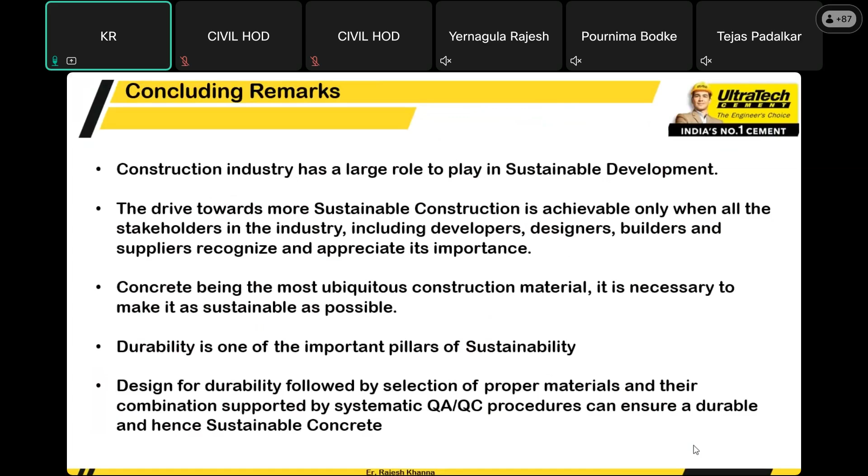I think this is the end of my presentation. With your cooperation and valuable time, I would like to thank you for giving me this opportunity to showcase my knowledge through this platform, so that as civil engineers taking up a role to build the nation, a country, ourselves, or a company, we need to be proud to say that we build structures for longevity and have a more sustainable approach.